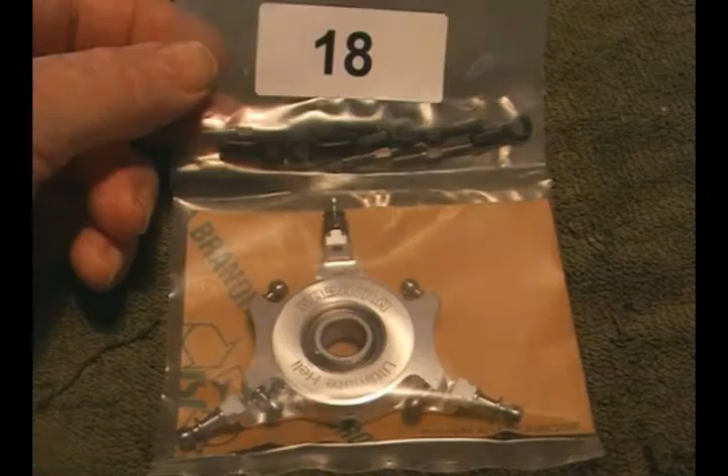Carrying on up the mast now, we stop off at the swash, and we've got to make up these ball links. These are a new ball link from Kasama, much sturdier than before, and they go onto these 3mm counter-threaded titanium push rods, which are very sturdy and very nice.

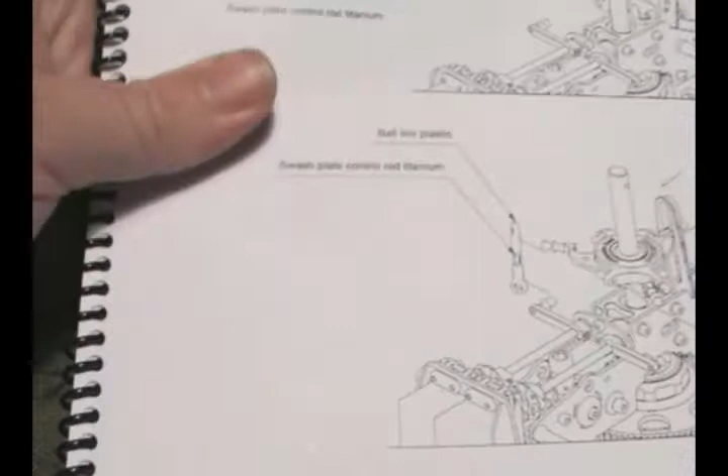The measurement given in the manual is to have 6mm between the actual ends of the ball links, or 34mm between the eye of the ball at each end. So we'll make those up now.

Now, because you've got a counter thread to make a turnbuckle, you have to use the wrench to hold the ball link in the middle, because one end basically threads on in a clockwise manner, and the other one threads on in an anti-clockwise manner.

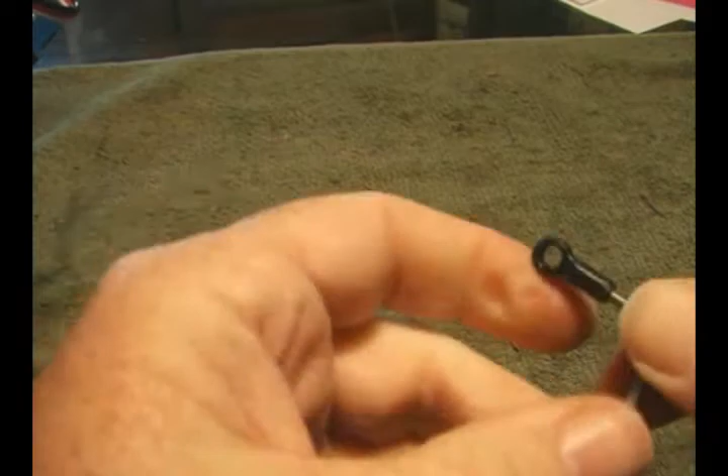And with the ball links, they're unidirectional, as I pointed out before, and basically they push on with the K sign facing away from the ball. So the slightly beveled bit to the inside is away from the K. So have the K facing you when you snap them onto the ball links.

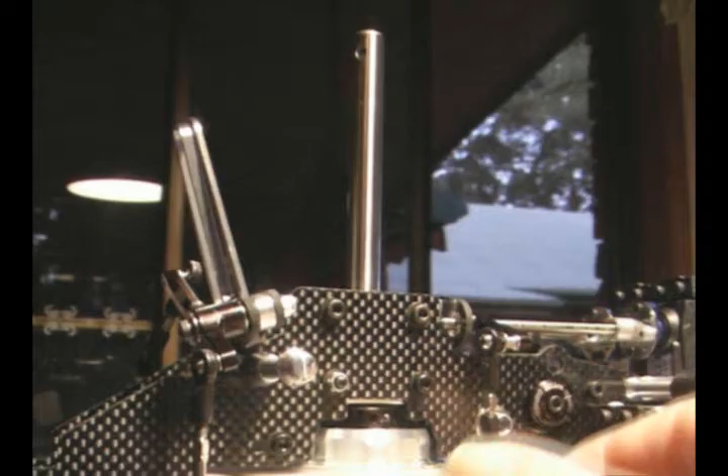We've got our 3 links reduced down to 34mm between the centres of the ball links, and they've been snicked on. They're very loose. They're really beautifully moulded. These are the best ball links I've seen, period.

They're very loose and freely moving, but there's not a jot of free play or slop in there, and they really go on with quite a lot of effort, which means obviously they're going to have a lot of effort to come off. The swash is interesting, besides its obvious right-angled inner ring.

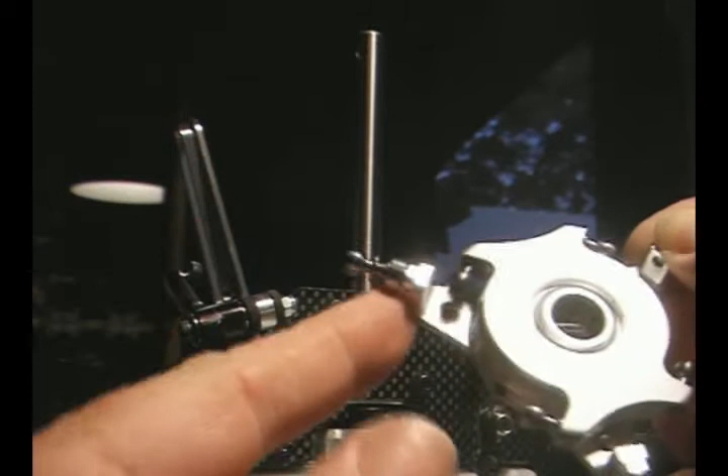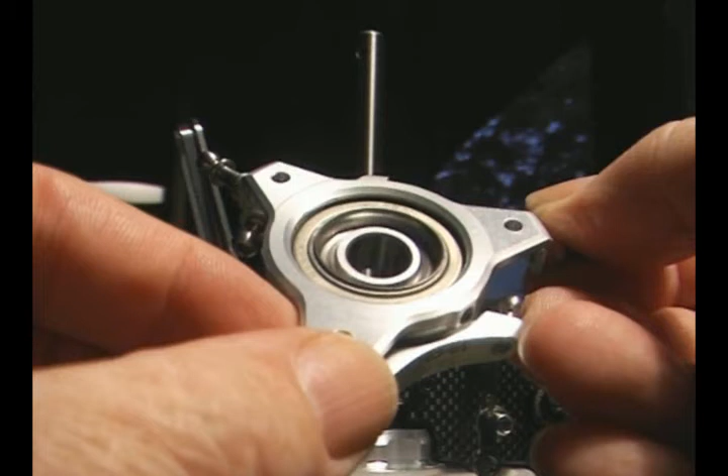It's got a bearing on the back outer ball link, which obviously goes up and down in the anti-rotation device. It's got a Japanese bearing inside, which for those who are interested is a 6804Z made by NSK, and it's also an adjustable swash.

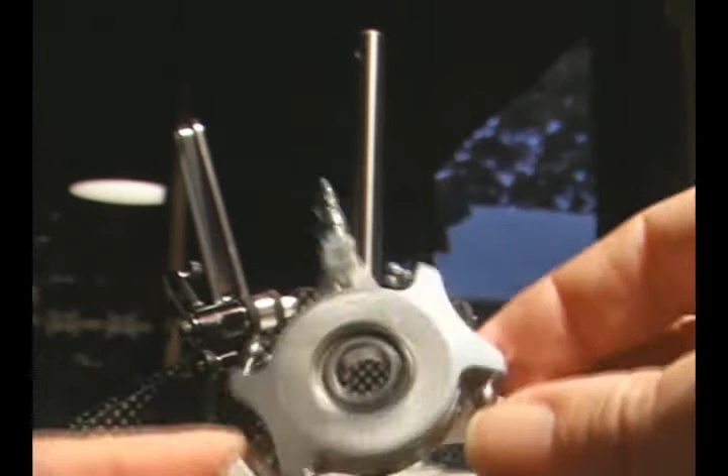If you see here these 2 set screws, 3 set screws on either side, this is a way of adjusting for wear in the swash, and it's found on the more upmarket types. Anyway, we can pop that down in there.

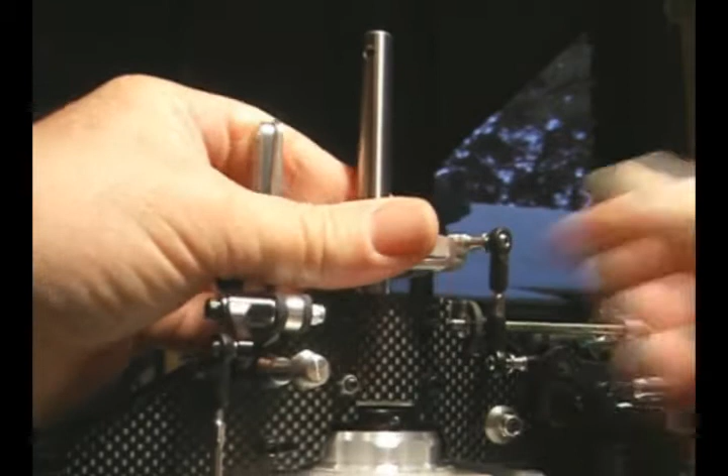Hopefully stick the roller bearing ball link through the anti-rotation guide, which we can then bring to the front and tighten up the clamp bolts, and then we can snick on our swashers, making sure they've got the K on the outside. That's the way that they go on.

We're on page 29 now, washout arm installation, and this comes from bag 19 with the 2 radius arms, washout arms and washout block. The parts look even nicer out of the bag than they do inside. This gorgeous copper insert, brass insert in the washout block.

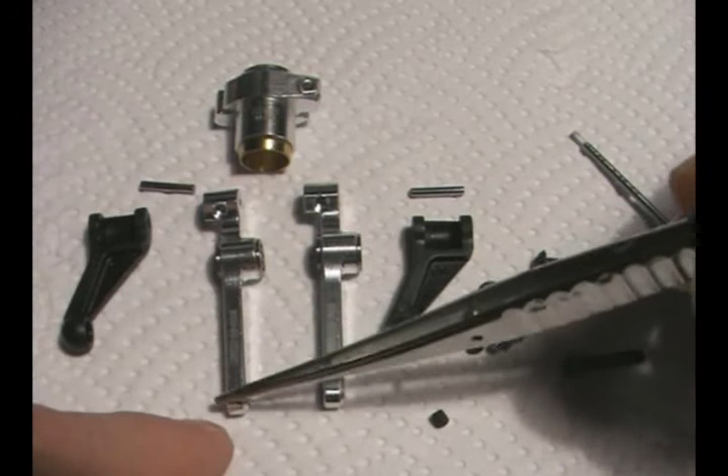Okay, the washout arms themselves, pretty straightforward. There's some ball links to go in the end, and the longer end, facing away from where the hub faces.

The radius arms basically mount up on these expanded ends of the washout block levers with a pin in, and the pin is retained by some M2.5 set screws down here, and then the washout arms are mounted up onto the block using these 2 M3 by 14mm bolts down here.

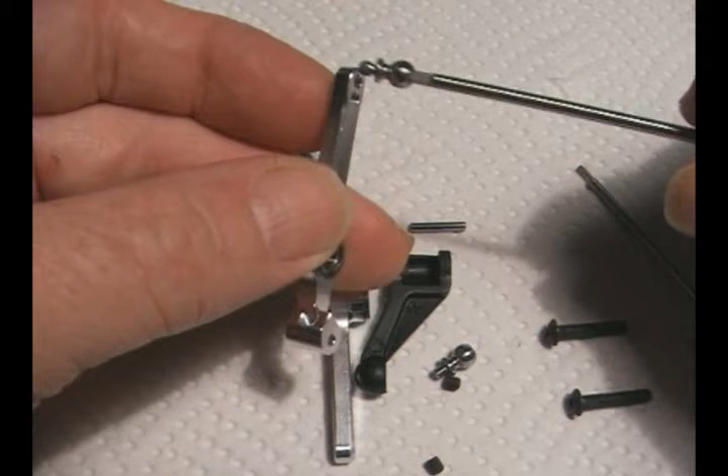There's 2 holes available for the ball link on the washout arm, but for now we'll use the outside one as indicated in the manual. The outside ball will tend to make the cyclic more responsive, and the inside one will be more stable. So if you've got any beginners to 90s and you want a more stable heli, pop the ball on the inside, but if you want it as lively as it can be, pop it on the outside.

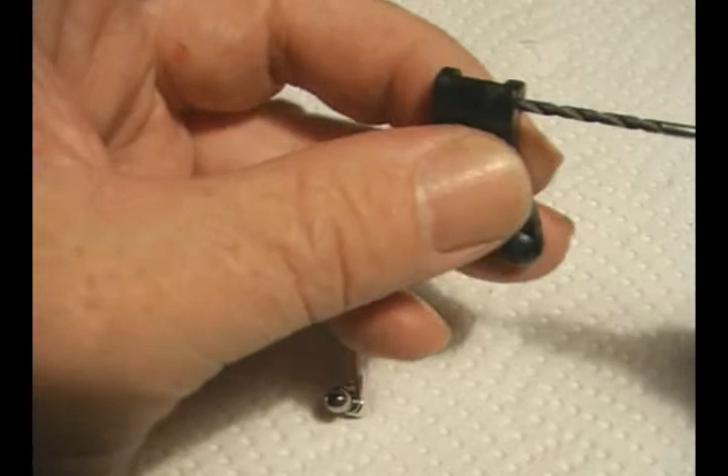I did find that these pins for the radius arms were very sticky and wouldn't go down the arms very well, so I've got a 2mm drill and I'm just using that to give them a bit of a polish. I found the radius arms were a little bit tight as well, so I gave them a ream out with the 2mm drill too, especially since the pins need to actually rotate in these plastic grips.

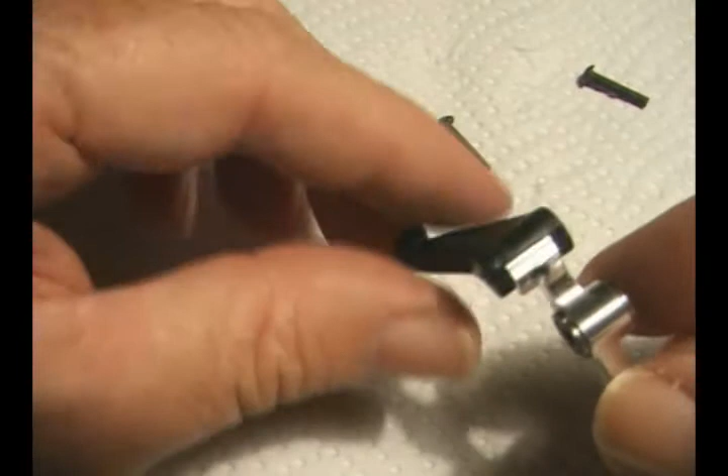So there's the arms finished. The set screw goes down into the end of the mixer arm to secure the metal pin that the radius arm hinges on, although it's so stiff going down there I'm sure it wouldn't come out. They're not too bad, but they're still a bit stiffer than I'd like.

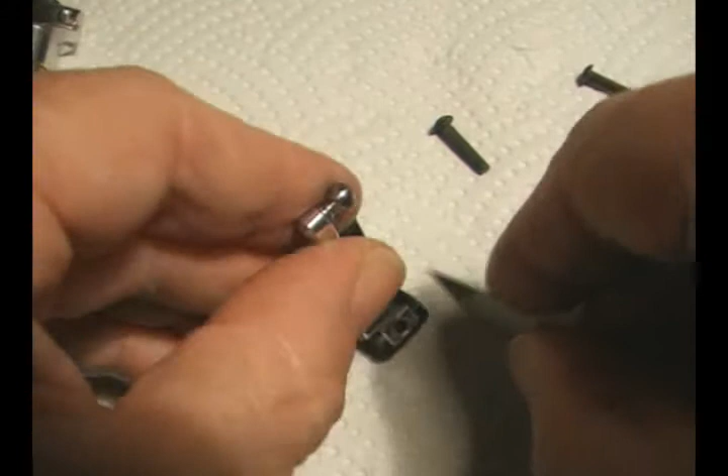Short of drilling these out, I don't really see much more I could do about that, quite honestly. You do the old trick of sticking a blade down between the plastic and the metal, which sometimes eases out the plastic a little bit, and that helps slightly, but we'll just have to wait for that to wear in a bit, I guess.

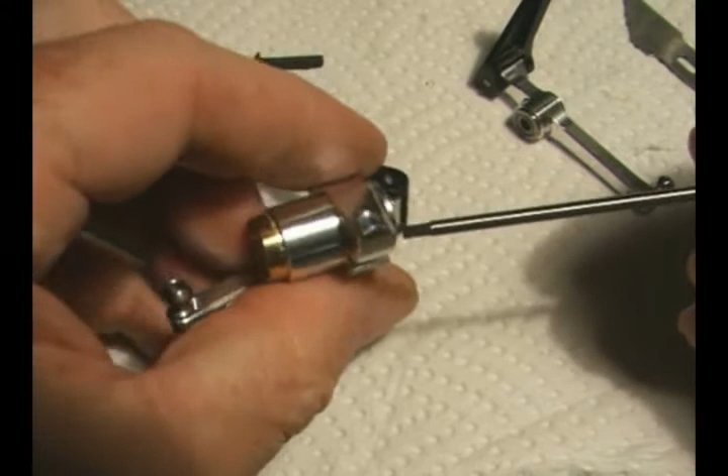The washout arms are screwed onto the block with the ball links facing inward. If you pop the blue Loctite down the hole rather than on the thread, it saves getting any on the bearing. You can do these M3 fixing bolts up pretty tight, and there's no need for any shim washers or anything like that, because these are already moulded onto the washout block. So pretty straightforward, and very free running washout arms on there.

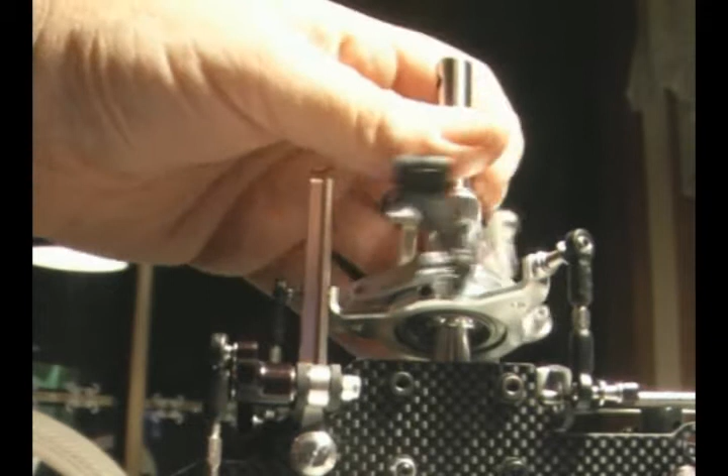That's lovely. Now we can drop it down over the mast and click these natty radius arms onto the backward facing links on the ball. I might need some ball link pliers to do that. There we go. Once they're in, they're nice and free. Do the same on the other side. There's our washout arm in place with the links clicked into the radius arms.

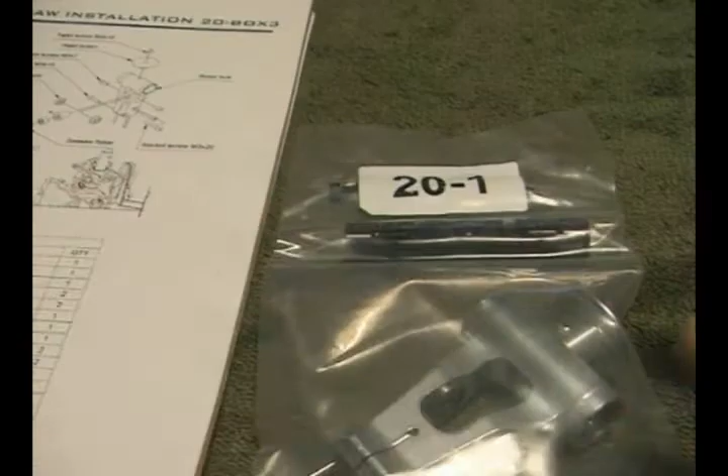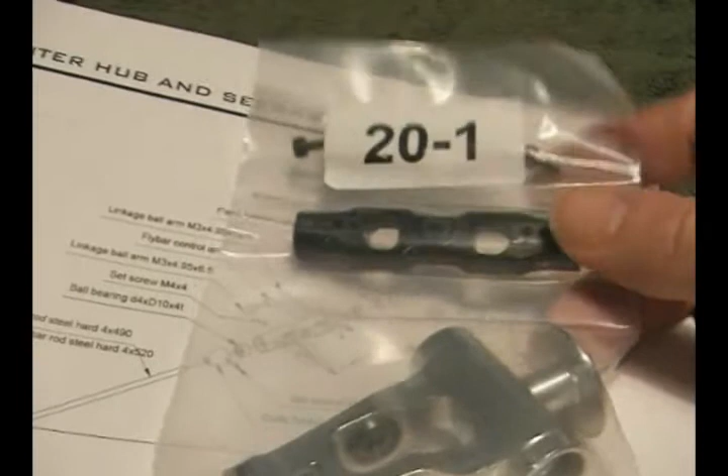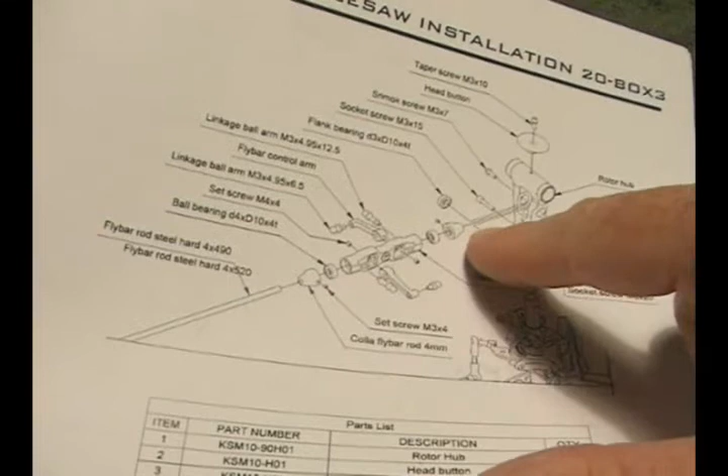Right, on with the centre hub and seesaw installation, shown on page 20. Now, I've just wasted an hour looking for bits. I thought I'd thrown something out. There's our seesaw with mounting bolts and ball joints, our centre hub, and where the heck is the control arms and the flybar collars? I have spent ages trying to find the darn things.

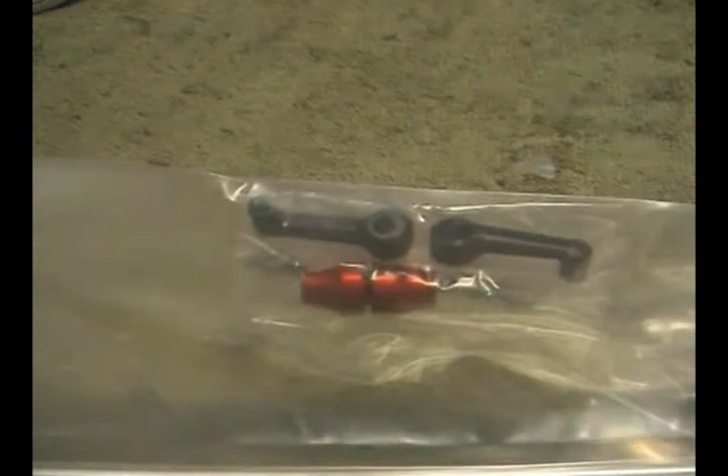Finally in desperation I had a look at the long box 4, which has got the flybar in it, and I pulled the flybar out, and there we go, lo and behold, packed in with our flybar in the long box. This is our bag 22, and that's the bits I've been missing, so I hope that saves you some time. Right, we'll cut these out and get on with the assembly.

While we're on bag 22, Kasama includes you 2 flybars, which is exceedingly nice of him. These are 4mm flybars, nicely set up like everything else. They've got 2 little ground flats, more or less in the middle on opposing sides. These come in 2 lengths: 490 and 520, so there's a 30mm difference between the two. The longer flybar might be just a bit more stable than the short one, depending on your paddle weight. I'll probably go for the shorter flybar first off.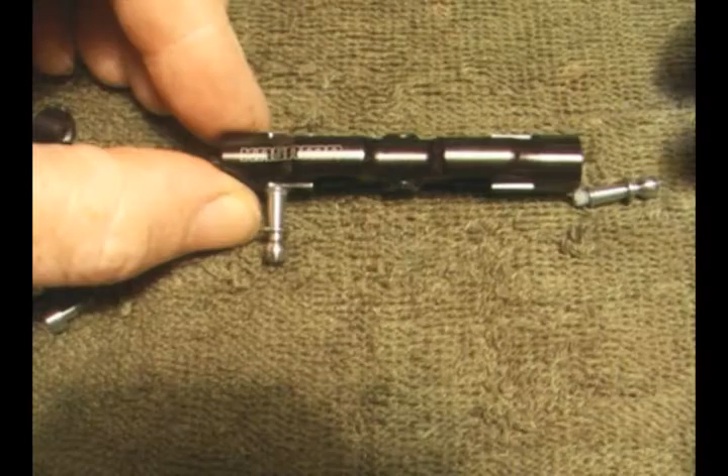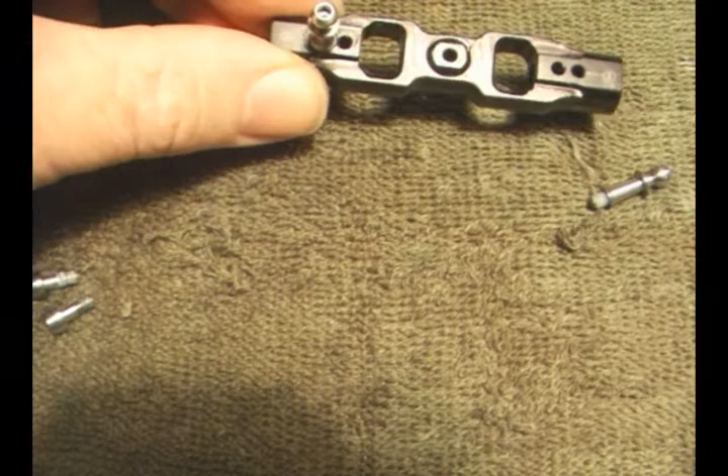Onto the seesaw assembly now, this is from bag 20. The seesaw is an interesting little item here, and I didn't figure it out first time round, so this is a redo video. It's got 2 orientations: you can either have the Kasama logo at the top, or you can have the part number down there. The difference is this: there are actually 4 different positions for these 12.5mm linkage balls to go in.

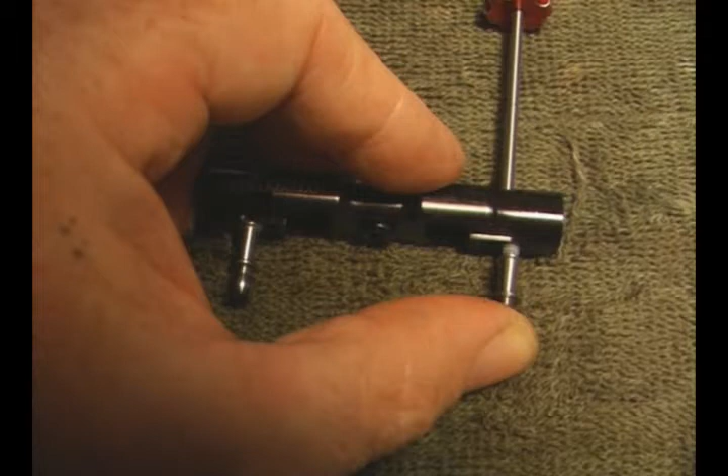These holes on one side and the other are staggered, so the outermost one on the back is slightly different in alignment from the outermost one on the other side. This means you've got 4 different positions you can put your linkage balls in to set up the mixer head, and these are labelled 1, 2, 3, and 4. The orientation can go in either way.

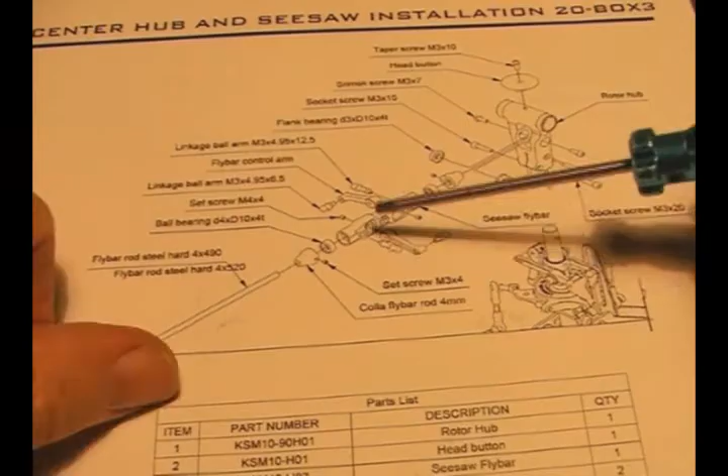The important thing is that your ball linkage actually goes into the same number. So if you're going to use number 1 linkage, the outermost position of the ball link, then you've got to use number 1 ball linkage on the other side. Now the manual shows the ball links in the seesaw going in the outer hole, which I think should be more lively, all other factors being equal.

But we'll have a quick call to Kasama and see what he says. We'll need our Thai secretary to be able to do that.

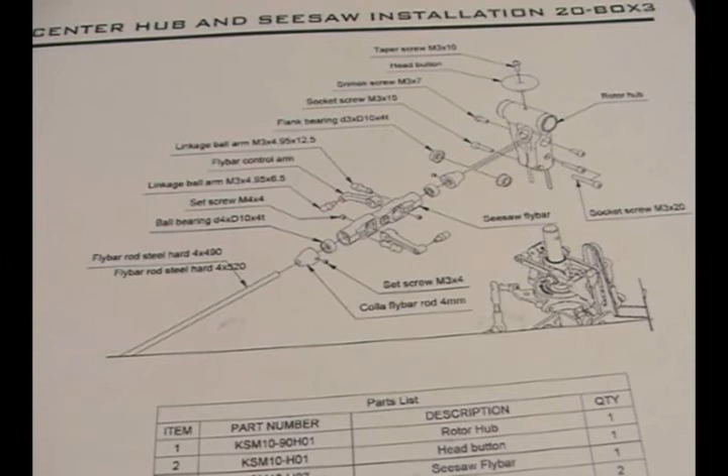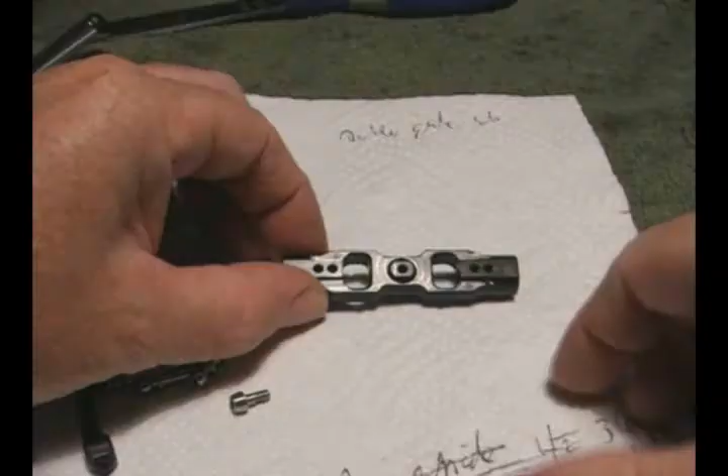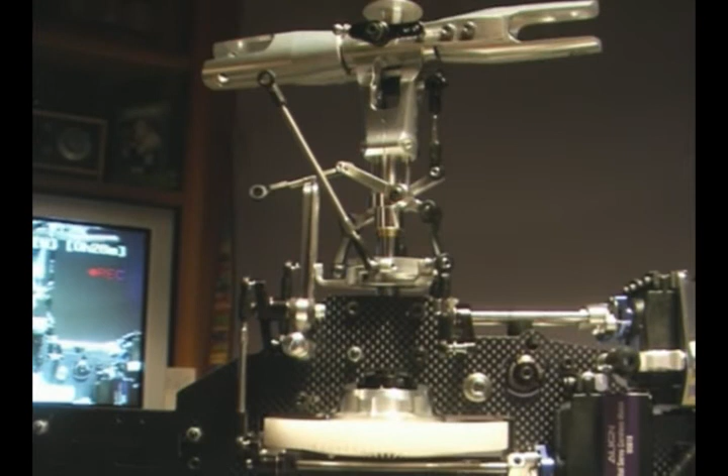I'm going to use number 2 here, and you can't actually fit your seesaw into the rotor head with the other ball link on, so we're now going to orientate this, and basically we need to have the ball link on the same side as the mixer arm.